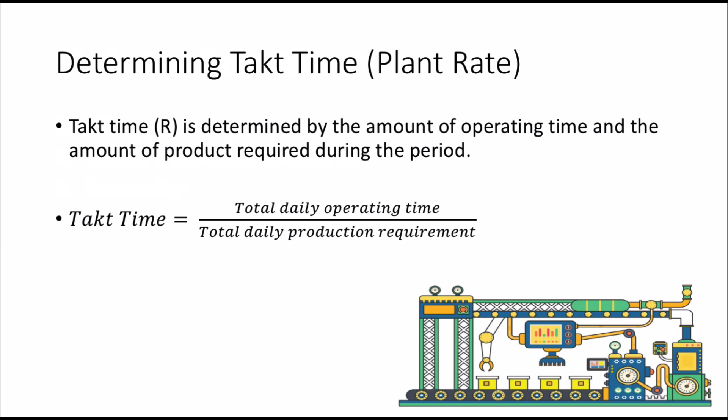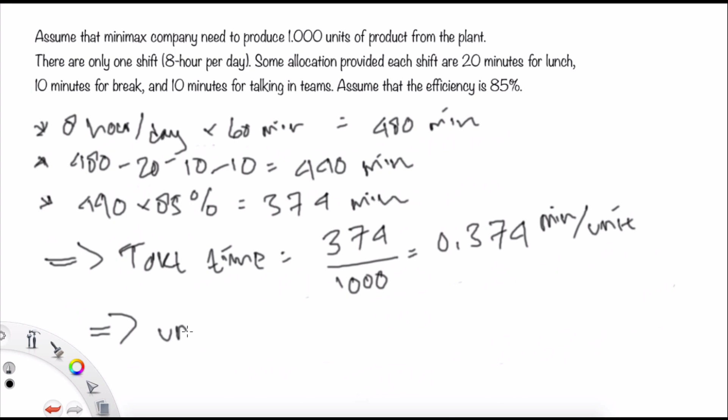Let's come to the exercise. Here it is. I've copied it and I'm going to show you. Please give me a minute to finish this work, and then I'll tell you how. Okay, this is how I finished this work. Let's come to the exercise.

Assume that the Minimax company needs to produce 1,000 units of product from the plant. There is only one shift, so the allocated time is 8 hours per day, with some allocation for non-productive time. The allocation provided each shift is 20 minutes for lunch, 10 minutes for breaks, and 10 minutes for team discussion. Assume the efficiency is 85%.

Actually, we have to find this efficiency number, but for this exercise, please assume the efficiency was taken from historical data, which mentioned it as 85%. Later, we will calculate our own efficiency.

The first information is the 8-hour shift converted to minutes, since all other information is in minutes, so we convert to get 480 minutes. Then 480 minutes minus 20, 10, and 10 minutes—counted from the non-productive activities—gives us the real operating time of 440 minutes. Then 440 minutes times 85% efficiency gives us the real number of 374.

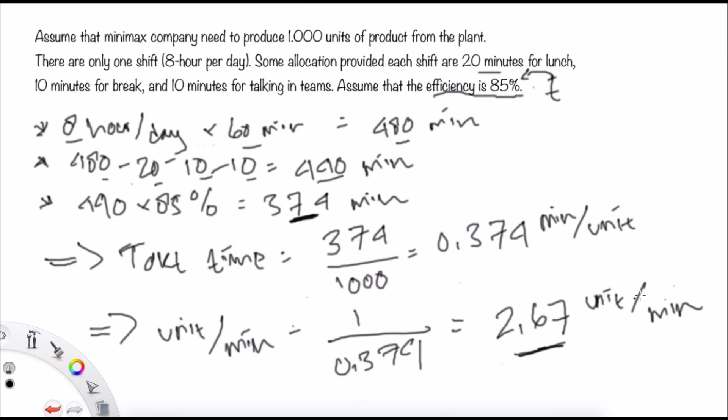The next thing is calculating the scrap and rework rates. It's undesirable but sometimes a manufacturing reality to produce scrap or unusable parts. Furthermore, often there is need to redo an operation simply because the part was not produced within the desired specification, so we have to rework. Scrap and rework result in inefficient and wasteful use of the facility's resources. So how can we calculate the scrap and rework rate?

It will be used if we want to produce 1,000 products in good, qualified condition. So how many products do we need if we have a percentage scrap in our production process?

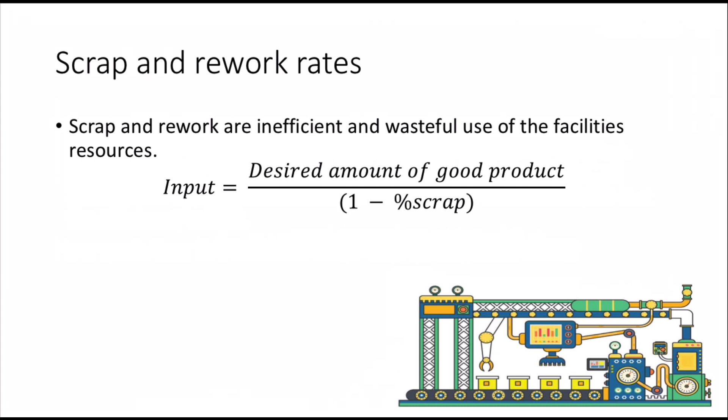Let's come to the exercise. As before, I have copied the exercise here using the preceding example. In one operation, we produce 5% scrap. So how many products must be produced if we want 1,000 good products desired by our plant? Just give me a minute.

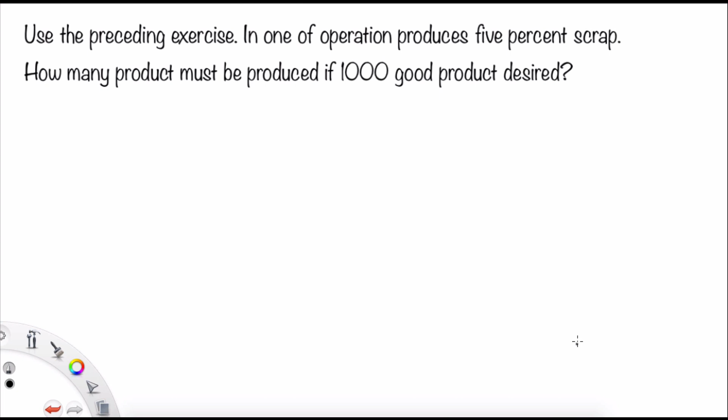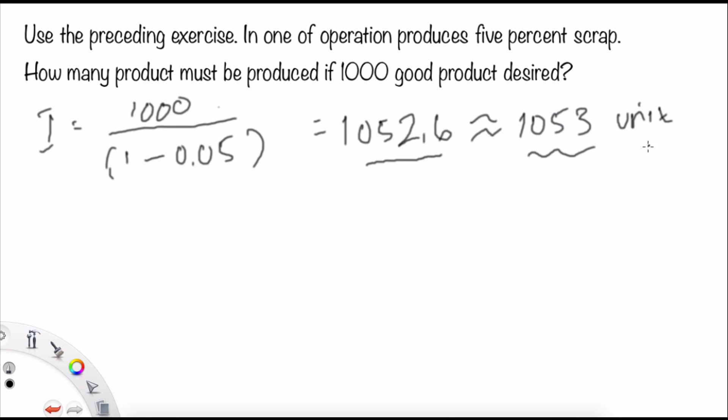From this, using the previous equation shown in the PowerPoint, if we have 5% scrap, we have 1,000 good products as the desired product, and we divide it by 1 minus the percentage scrap. So how many products must be produced if 1,000 good products are desired? We have to produce about 1,052.6, or it can be rounded to 1,053 units. Let's come to another exercise.

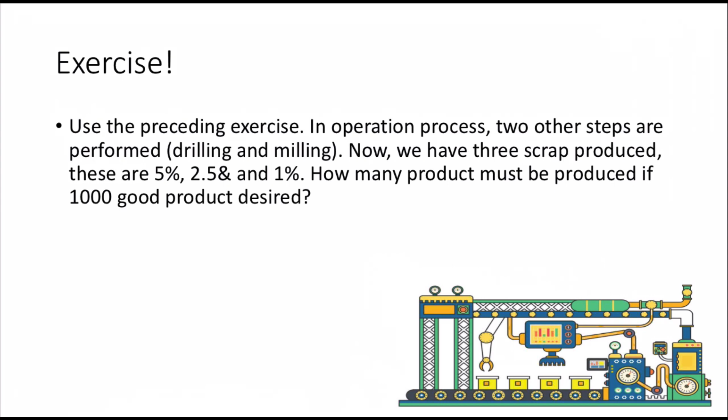Still using the preceding exercise, in the operation process 2 other steps are performed - we can say drilling and milling. Now we have 3 scraps produced, at 5%, 2.5%, and 1%. So how many products must be produced if 1,000 good products are desired?

From this information, we have 3 scraps: 5%, 2.5%, and 1%. So how do we solve it? Let's check this one.

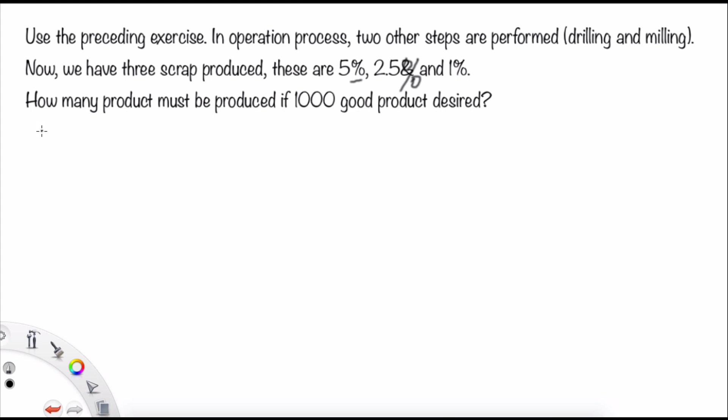If you have 3 scraps at 5%, 2.5%, and 1%, this is how to solve the problem. We have to divide by 1 minus 0.05, meaning the 5%, times 1 minus 2.5%, times 1 minus 1%. We get 1,090.5, or we can say 1,091 units have to be produced if we desire 1,000 good products.

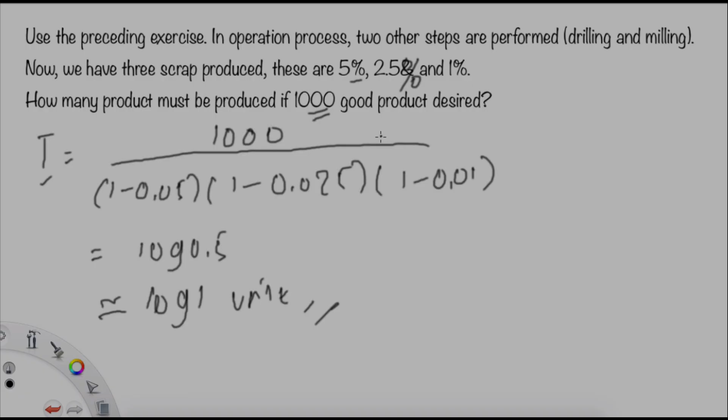Now let's come to the product design department. There are 4 main points of the product design department. The first is blueprints. The second is the bill of materials, indented bill of material actually, and there are also assembly drawings and model shop samples.

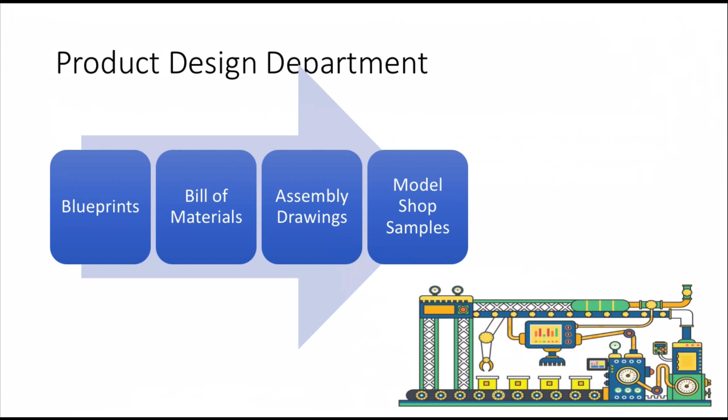We start with the blueprints. The blueprint is used to communicate the idea of what a company wants to produce. It's very important because it informs the facility designer of the prime mission, giving a detailed description of what needs to be accomplished. A blueprint, or we can also write it as a sketch, pictures, CAD (computer aided design) drawing, and other forms, is needed for drawing.

What is a simple blueprint? A part drawing, sample blueprint, and also a sketch of your product. And don't forget, you need to make the part list.

The part list is also important because the designer will need it - we have to know what parts must be produced and in what quantities, because it correlates with the decision whether to fabricate or to buy. Your drawing can also be an exploded drawing, which is very useful to show each detailed part of your product.

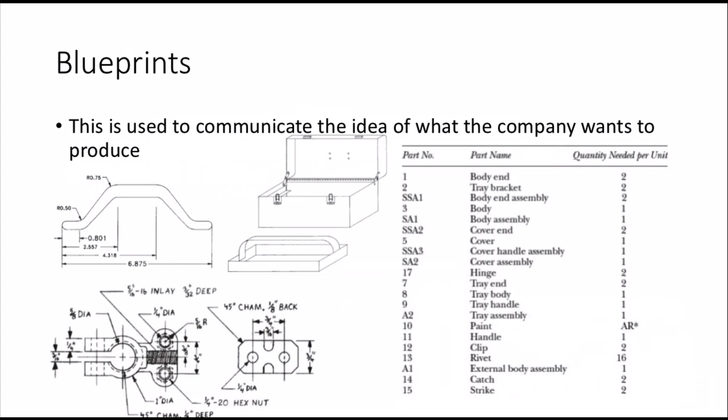And then the bill of materials - this is an example of the bill of materials. You can give the name of the company; I used a Minimax company example. And then the product prepared by date.

Most importantly, you have to write the level of your part, and also give the decision whether you want to make or buy.

The bill of material presents the hierarchical structure of the product by identifying the assembly, subassembly, and required subordinate parts of each assembly or subassembly. Level 0 indicates the final, finished product.

Number 0 is at the top of the list, which is the finished assembly product. Under this list is the major assembly, each assigned as level 1, the final assembly before the finished product.

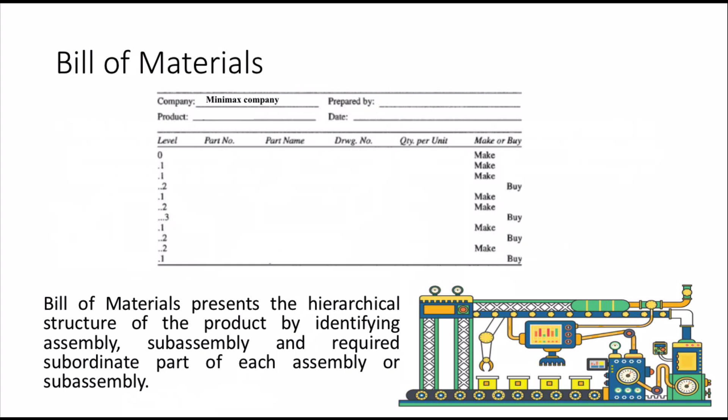And under this, that will be the sub-assembly in the second level, the sub-assembly and the minor assembly in level 3. So please fulfill all of the material in this form.

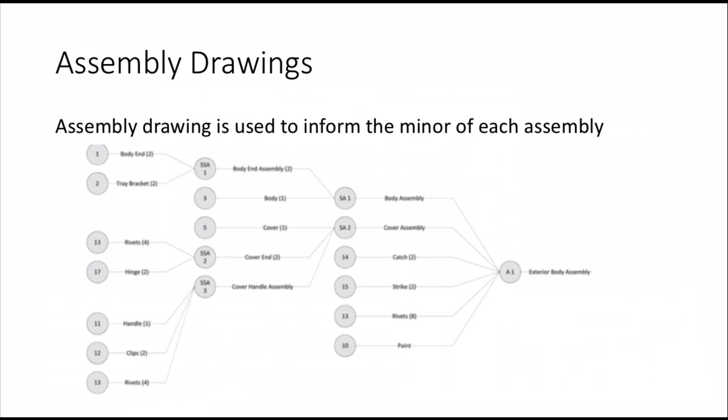So you can use this one as a part. On the left is the part number, and the second one is level 2. Level 3 is the sub-assembly, level 2 is the sub-assembly, and level 1 is the assembly, which is the exterior body assembly. And then the model shop samples, or we can say there is a prototype.

Usually it's handmade and very costly, but it can illustrate the exact model of what kind of product wants to be produced. So it is costly. Of course they are not always available, but if they were, they will be very helpful.

So the designer will know the feel of the part, take them apart and reassemble, look at each part and consider how to make the part. So it's very specific - there will be a systematic disassembly of a prototype.

It will be helpful to give the comparison of the product that will be produced with our competitor. So if you want to make the model shop sample or prototype, please unpack the unit, play with the finished product to see how it functions, because a good understanding of the finished unit is very helpful.

Then please disassemble the product, look at each part, and make a decision: you want to make it or buy it. Because if you buy out all of it, maybe it's cheaper, but then you will be called an assembly plant, not a manufacturing plant.

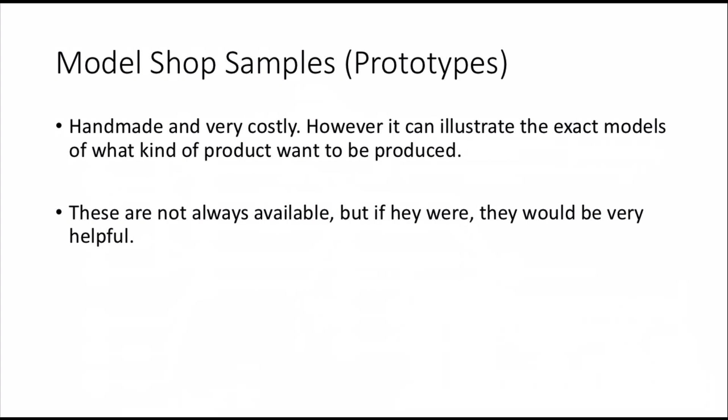This is the make or buy decision - how we decide whether we want to make or buy our part. Actually the decision normally is straightforward and easy. If we are an existing company with a product line, we can see and we know where the part can and cannot be made.

So what have to be considered - I have summarized some important things to be considered. The first one is to know what the company can and cannot make. So please understand your line of production first, and then buy all parts and become an assembly plant. If you don't want to be a manufacturing plant, only an assembly plant, you can buy out all parts.

Check the takt time. If you can fabricate it faster than the supplier, please fabricate it. Check the cost - if you can make it cheapest, because the cheapest is always the best. And then check the space availability, because if you need a department for fabrication and other space, it will be costly - you need the space and also the cost to enlarge your space.

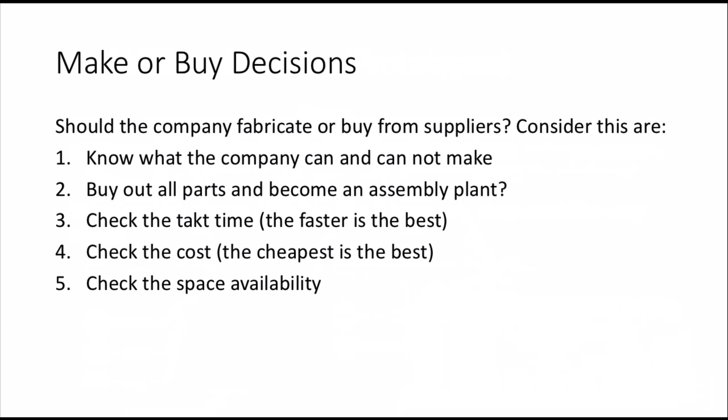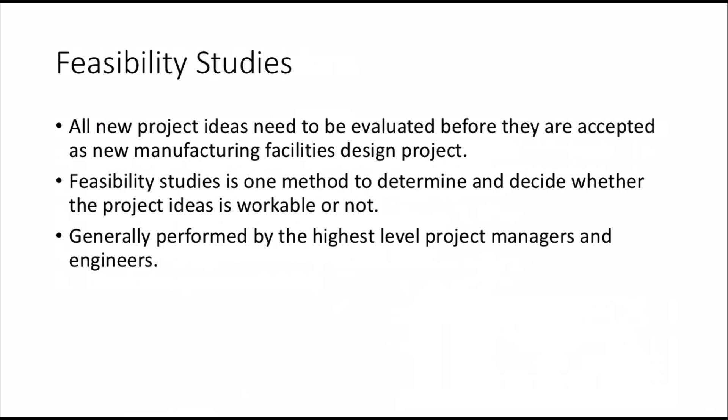For example, maybe 4 or 5 new project ideas are proposed, but only one project was approved. Why? Because the others are not feasible. That's the function of feasibility studies - to give you analysis early.